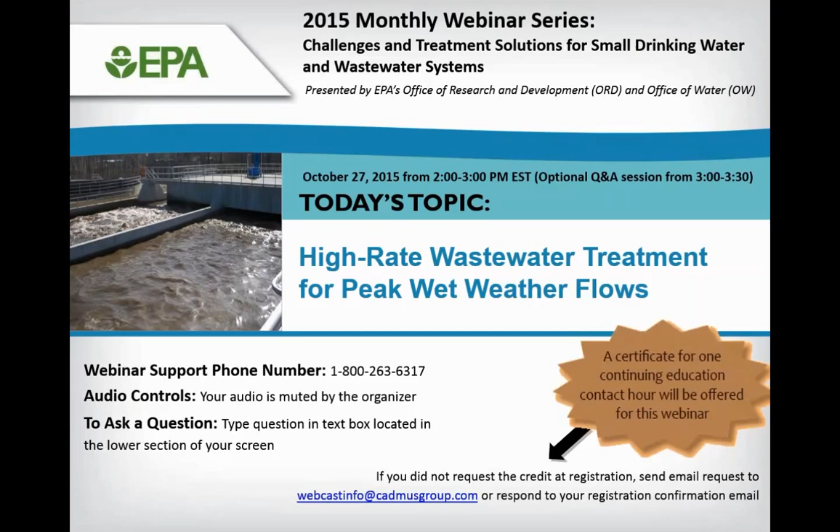Today's topic is high rate wastewater treatment for peak wet weather flows.

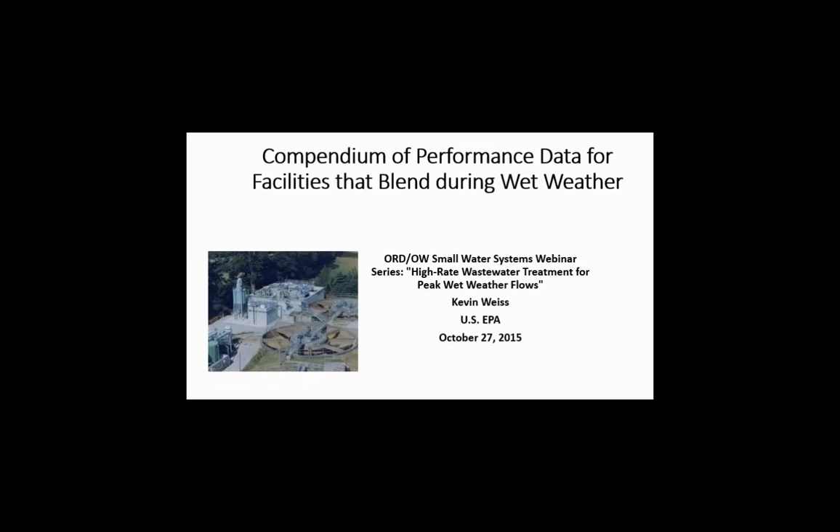With that, what I'll be talking about is a blending scenario. When treatment plants can't discharge out an overflow point and the flow gets down to the treatment plant, what they can sometimes do is provide primary clarification for all the flows coming into the plant, and limit the amount of flow going through biological treatment by bypassing the flows around the biological treatment works.

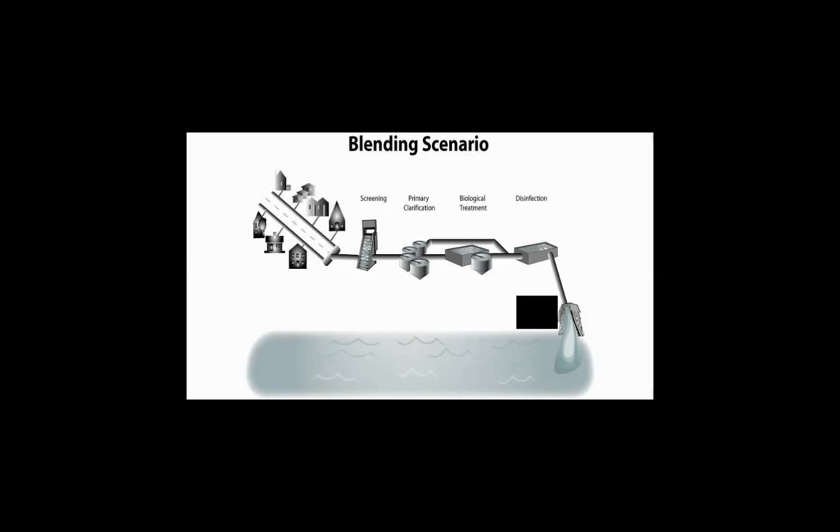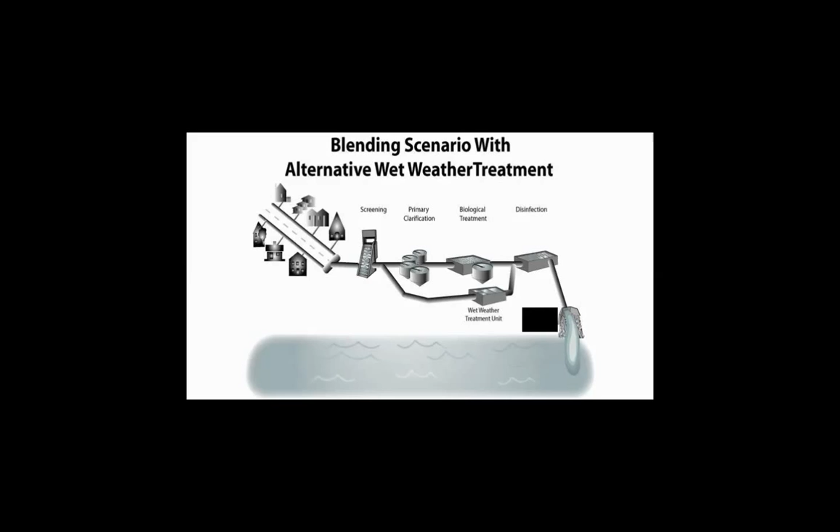I'll use the term blending to describe the scenario where flows are mixed back with treated flows from the biological treatment system prior to disinfection. The other scenario I'll be looking at is when a wet weather treatment unit, typically a non-biological system, is put on the diverted flows prior to blending.

We've been looking at this issue for a couple of years now, and in 2014 we invited a number of engineering and public health experts to discuss some of the implications with blended discharges. We ended up with 7 public health experts and 5 engineering experts. An in-depth summary of the forum we had is on our website.

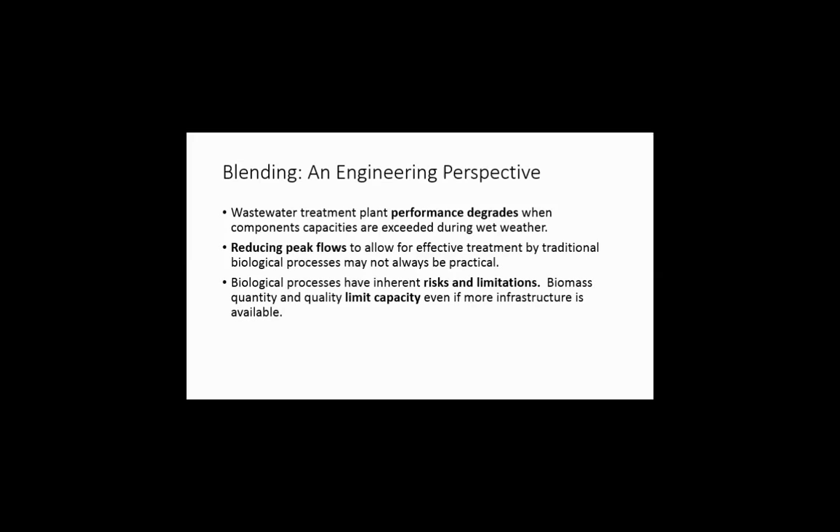We started the forum with a discussion from our engineering experts, and some of the key points they raised were that we had to be aware that performance of our treatment plants degrades during wet weather, and that it wasn't always possible to reduce the peak flows to a point where the biological system wouldn't experience difficulties.

There are some things that could be done at the plant to reconfigure the flows through the biological treatment unit, but at some point that started to decrease the treatment effectiveness. The experts said that one thing we should be looking at are physical chemical methods to treat the wet weather flows, and they emphasized that there's going to be more and more problems with wet weather flows as more nutrient controls get online at treatment plants, making them more sensitive to these wet weather flows.

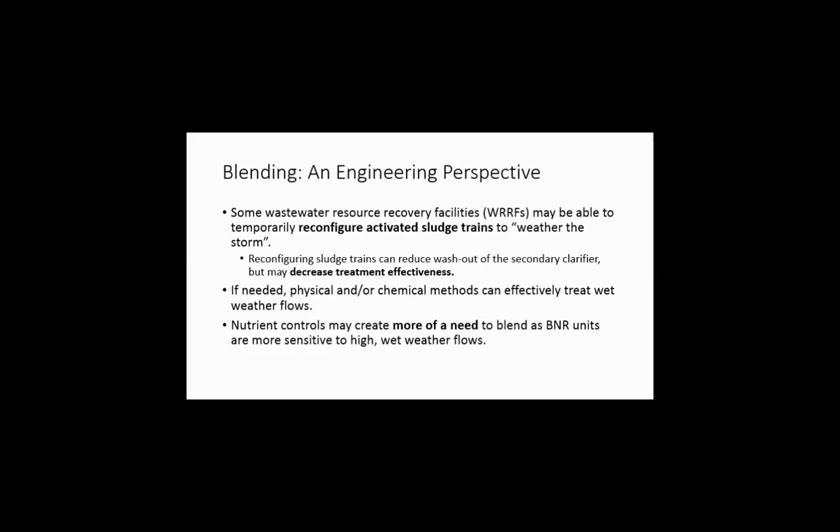The public health experts talked on a number of subjects which are listed here. The first being the knowledge gap, and one thing they emphasized is that the human health risks associated with wet weather flows and blending in particular at treatment plants is going to be very site specific, so we weren't going to have epidemiological studies to guide us. Instead we'd have to look at monitoring data from specific facilities and take a look at the receiving water to make estimates on the impacts.

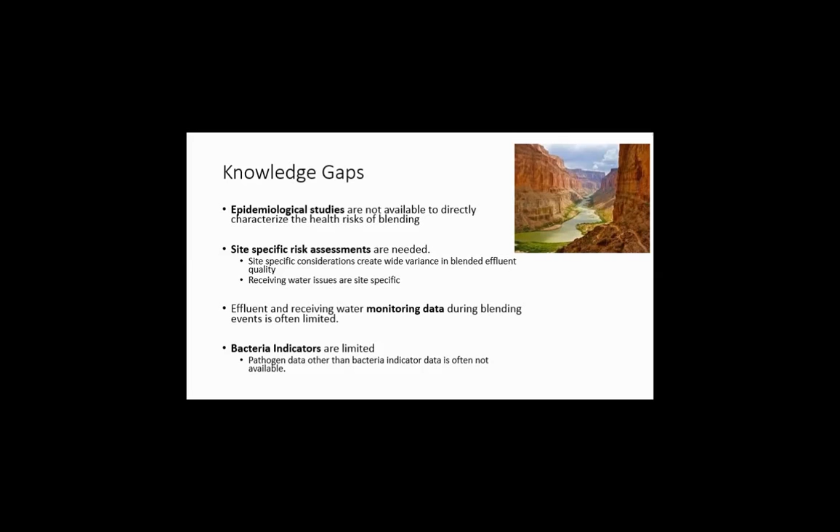One major problem facing us is that most facilities look at bacteria indicators, and those are very limited in ways I'll discuss later on. The biggest limitation is the lack of correlation with viruses. A lot of studies have shown that viruses are really the leading cause of illnesses associated with recreational water contact, and the bacteria indicators we tend to use now are not good indicators for assessing the risk of viruses. So this was going to be a big issue for us.

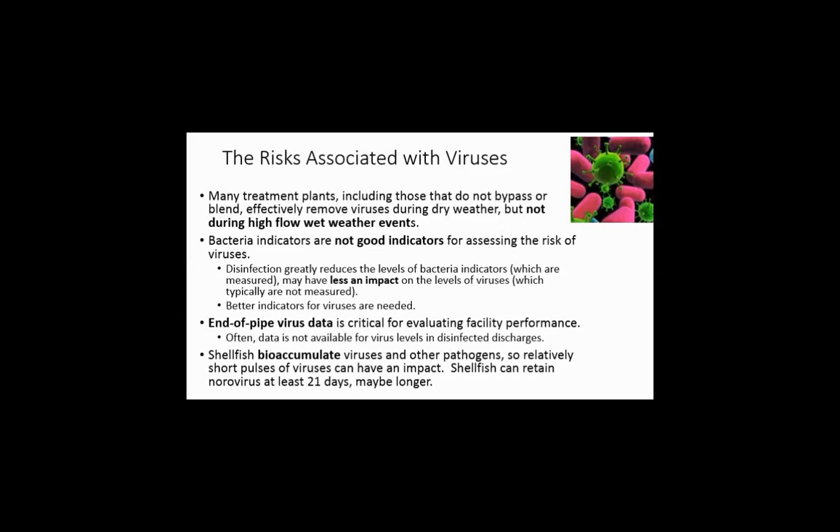The engineers stressed the importance of the disinfection unit. They indicated this is probably the most important unit for reducing viruses and other pathogens, and really the way a lot of the engineers looked at it was that they start with the disinfection unit and use that as the basis for plant design.

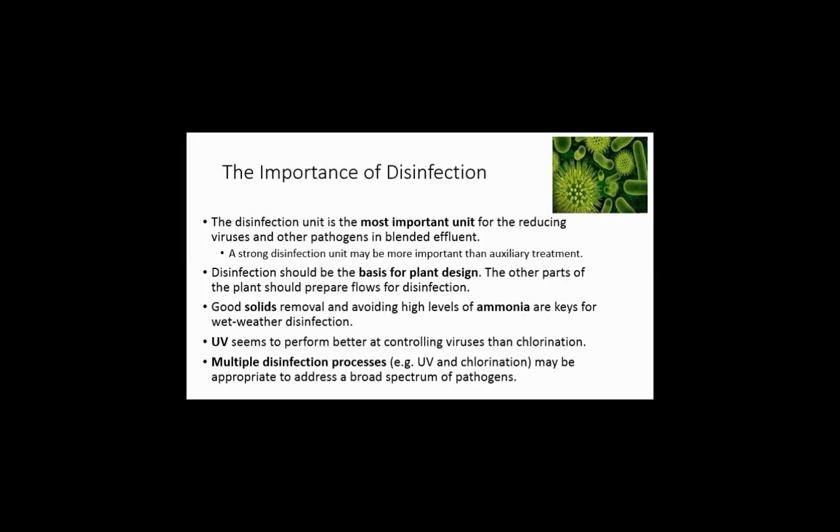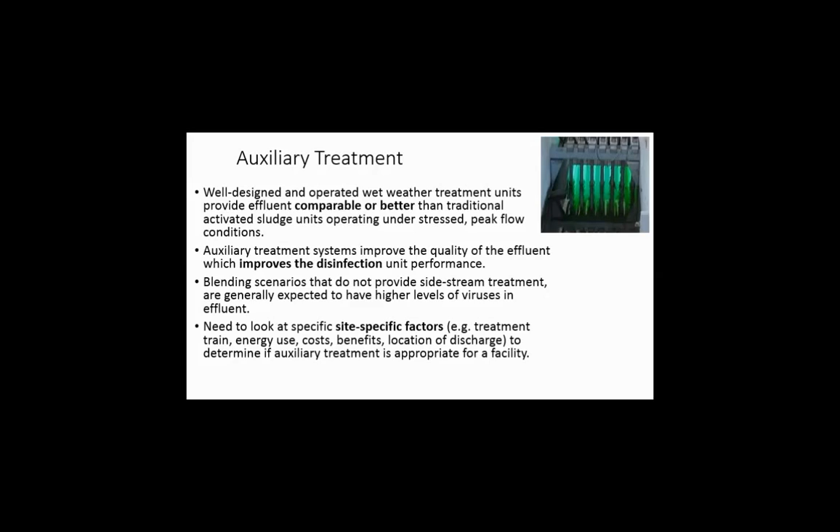However, the engineers recommended that there were cases where side stream treatment, or physical chemical treatment on flows diverted around the secondary treatment units, would be appropriate and something we really should take a look at. They felt that a well-designed physical chemical unit could give us performance comparable or better than traditional biological units working under stressed conditions. The importance here is to remove the solids so that it will improve disinfection.

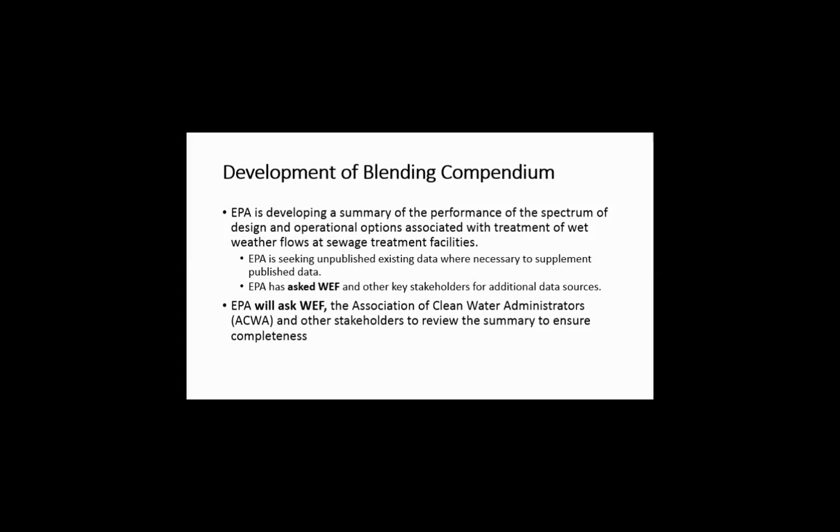With some of the gaps we noted coming from the public health forum, we realized it was important for EPA to try to gather data on the performance of treatment plants under wet weather conditions. That led us to work on our current project, the development of a blending compendium, which will try to summarize data from facilities around the country. We're working with WEF and other stakeholders to try to gather data on this, and this is an ongoing project.

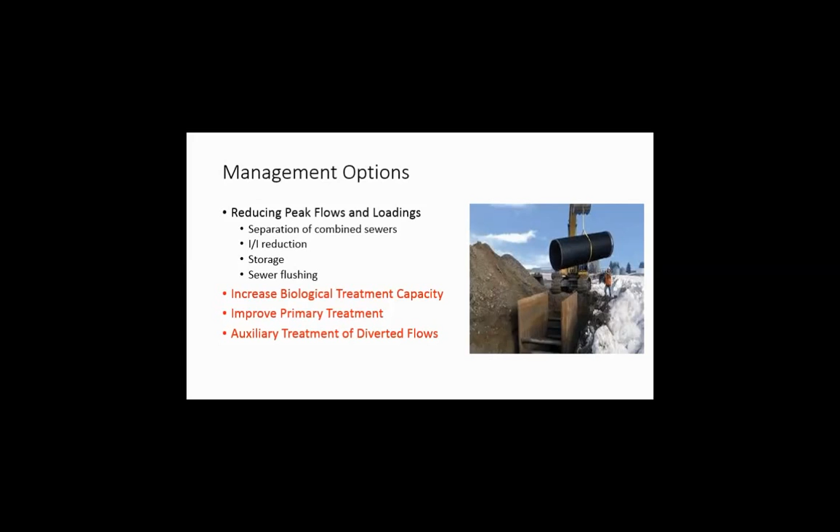I want to set the stage for the compendium a little bit. Looking at everything going on during wet weather, there's a lot that needs to be done in terms of reducing the peak flows and the loading. Unfortunately, the compendium's not going to do that. We're just going to focus on the treatment plant, looking at ways being done to increase biological treatment capacity as well as improve primary treatment and treatment of diverted flows.

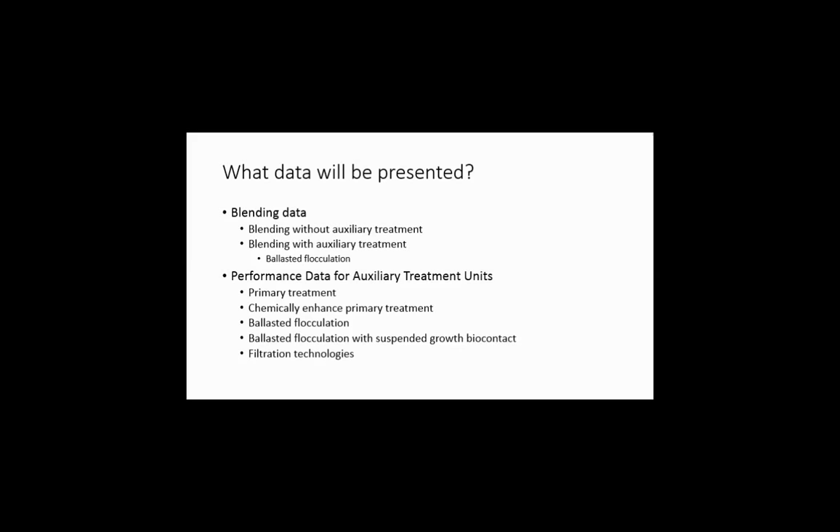We're hoping to present some data on facilities that blend. Unfortunately, we haven't been able to track down a lot of data that specifically looks at blending at facilities. So what we are also going to do is look at the performance of some of these physical chemical treatment systems.

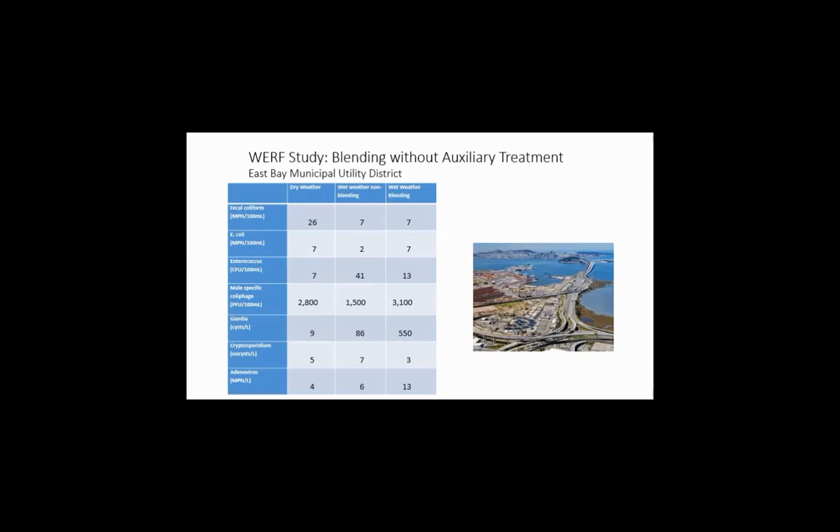We have two major studies that looked at blending without any sort of side stream treatment. The first was a WERF study that looked at the East Bay MUD facility, located in Oakland, California. This was a system serving a sanitary sewer system, so the flows were high but not tremendously high, and it also had a very good disinfection process going on. In this particular case, we did see some slight increases in some of the pathogens when blending was occurring, but really the data was very comparable to what was happening without blending during wet weather, or even during dry weather.

We had a second study that ORD helped develop in working with the IEC, looking at three treatment facilities in New York City served by combined sewers. Because these facilities were served by combined sewers, they were having much higher flow conditions. We also noted there were some operational problems at some of the facilities. This all goes to show that the data we tend to look at from wet weather facilities is very site-specific.

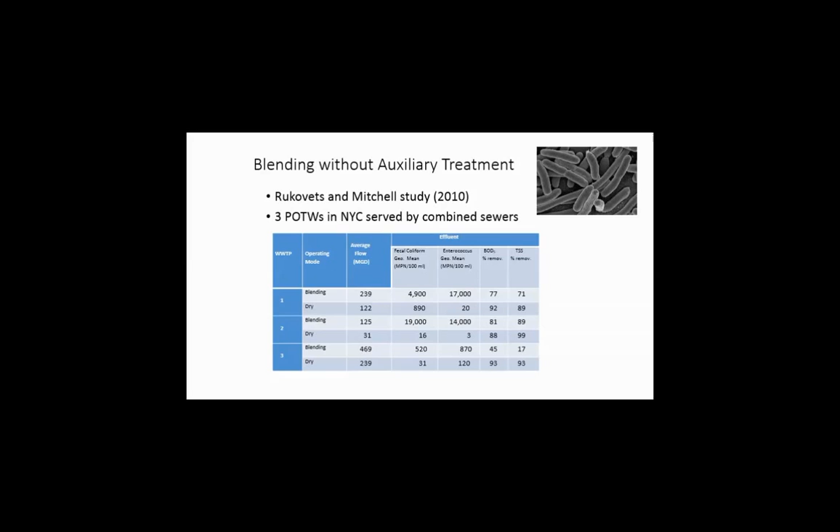One of the keys in this particular study was the disinfection units. Here they had limited capacity in their disinfection units, and when they got into a wet weather scenario, they had to cut down the contact time for the chlorination they were using. As the data showed in the previous slide, there was much less pathogen reduction during blending.

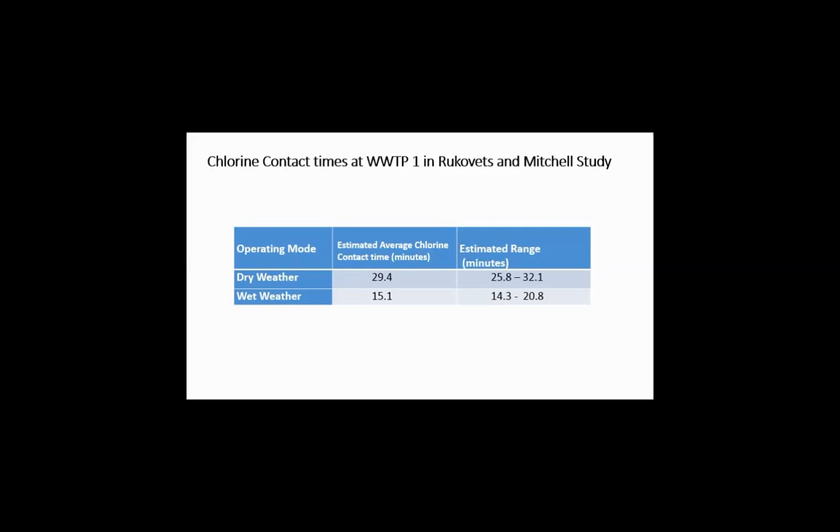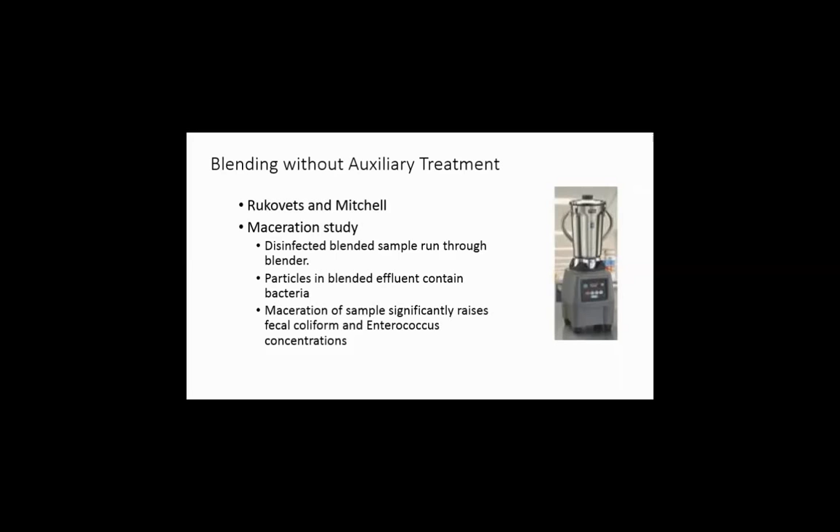Another part of their study was to look at the particles in the effluent. They took effluent samples and put them in a blender, then retested the samples coming out. What they found was that the effluent had a significant amount of particles, and when they went through the disinfection process, the pathogens on the outside of the particles were killed, but they remained viable inside the particle. When they got into this blending environment, they were released, and hence you had much higher counts of pathogens after blending.

So we've been looking at facilities that try different techniques to improve the treatment at the plant. One of the things we've looked at is chemically enhanced primary treatment, and here you can see we have some fairly significant improvement in terms of TSS removal, which is ultimately going to help us with our disinfection. In addition, we're able to increase the capacity of these primary treatment units by using chemicals to enhance the treatment.

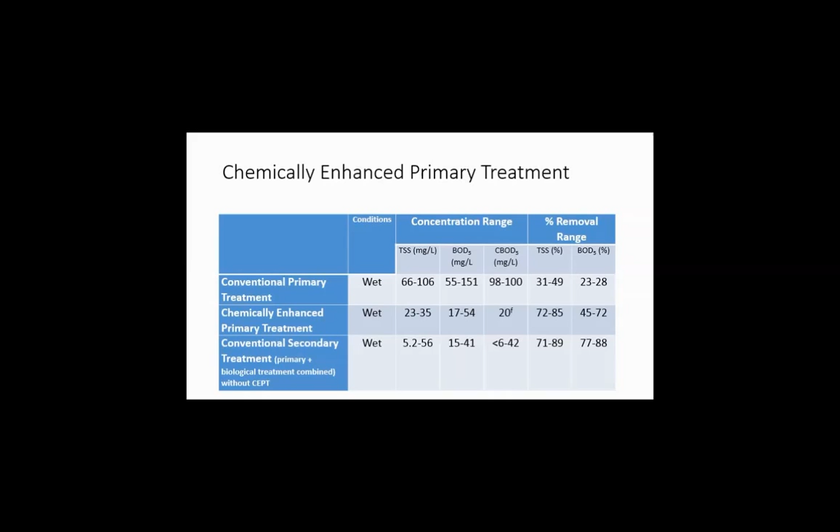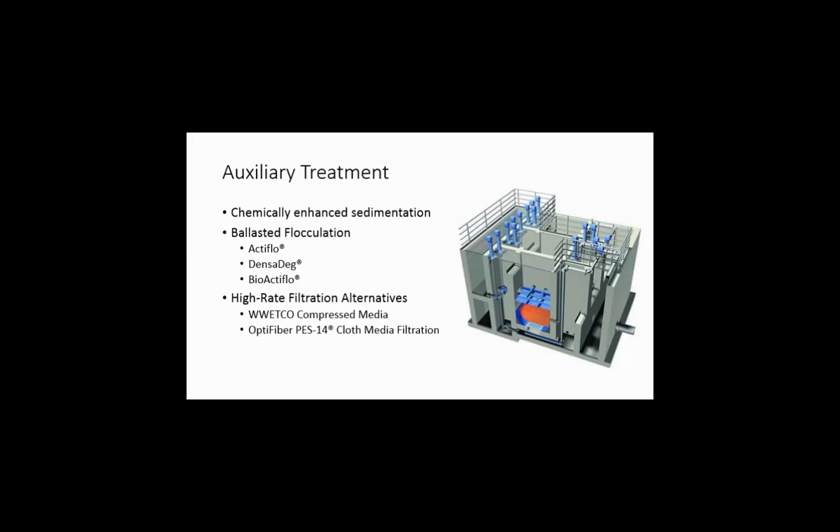We were also able to look at a number of physical chemical treatment systems on the diverted flows around the biological system. One was a ballasted flocculation system. The vendor refers to it, or the trade name is, Actiflo.

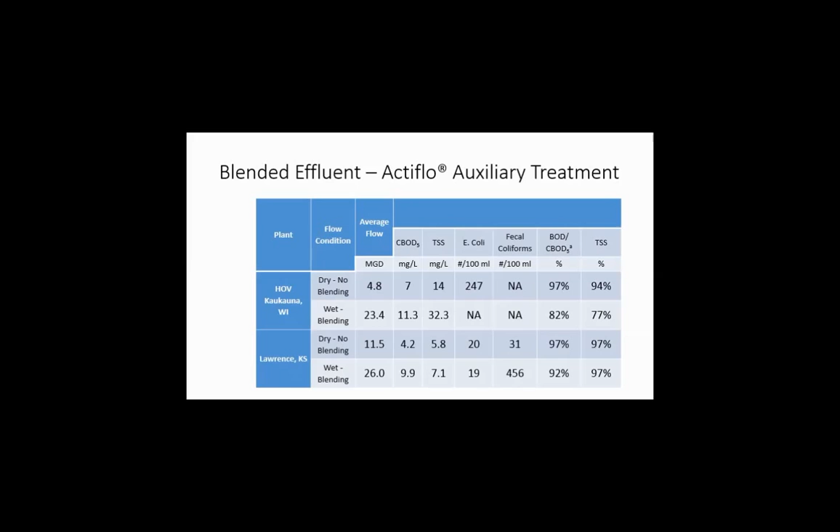In terms of blended effluent, we were able to identify two facilities that had good blending data, and we tend to focus a lot on the BOD and TSS data. As you can see, you're getting good TSS removals during blending, particularly for the Lawrence facility, and somewhat of a reduction for the BOD, particularly in the Wisconsin facility.

In addition to the blending data, we also had some specific data on how the unit itself was performing - this was coming straight from the unit without blending. I think one of the things this really shows is that the performance of these facilities really depends on how well the system's operated and what sort of chemicals are used in preparing the solution for the ballasted flocculation system. You see a fair amount of variance here.

The Lawrence facility was our star facility, and we talked a number of times to the operator, who attributes it to 10 years of experience running it, and that they really emphasize training their personnel and fine-tuning what's going on with it. The results show here - some of the other facilities are not getting as good results.

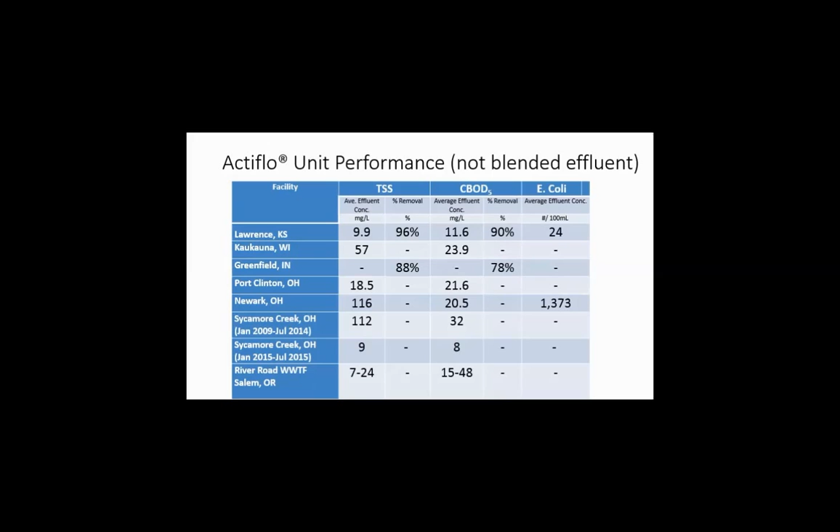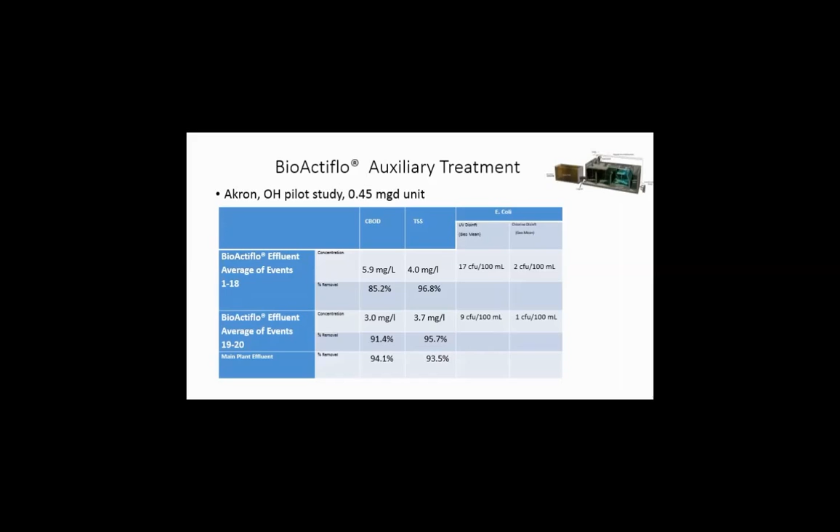The vendor for the Actiflo facility made some modifications to try to get additional BOD removal. They added a biological component with a short contact time, on the order of a minute or so, but that short contact time was able to get significant results in CBOD loading reductions. Depending on how the system is run, they were able to get above 90% removal for CBOD. What our enforcement folks found when they took a look at that system was that, as run under those conditions, it was able to meet our secondary treatment regulation requirements, which is a big deal in the wet weather context.

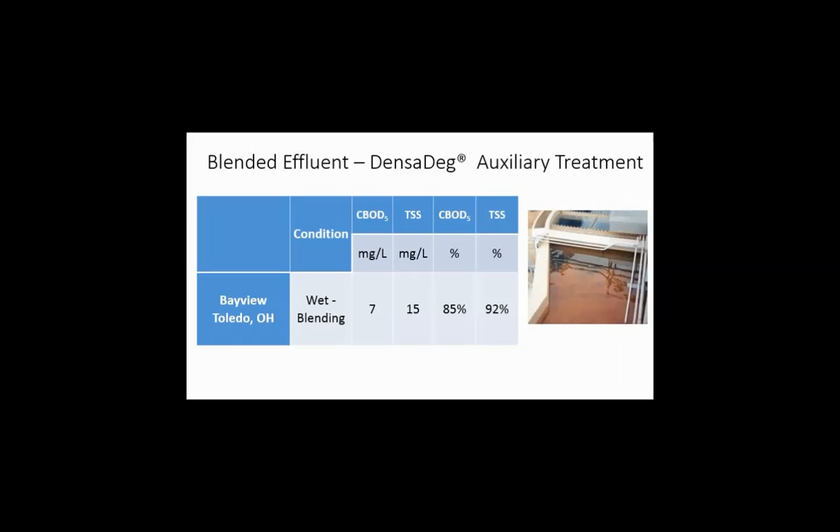We also looked at the DensaDeg product, which is another form of ballasted flocculation. We're getting data from a facility in Toledo - it's a 185 MGD facility, and it's come online a little more recently, so we're interested to see what the trends will be with performance on this.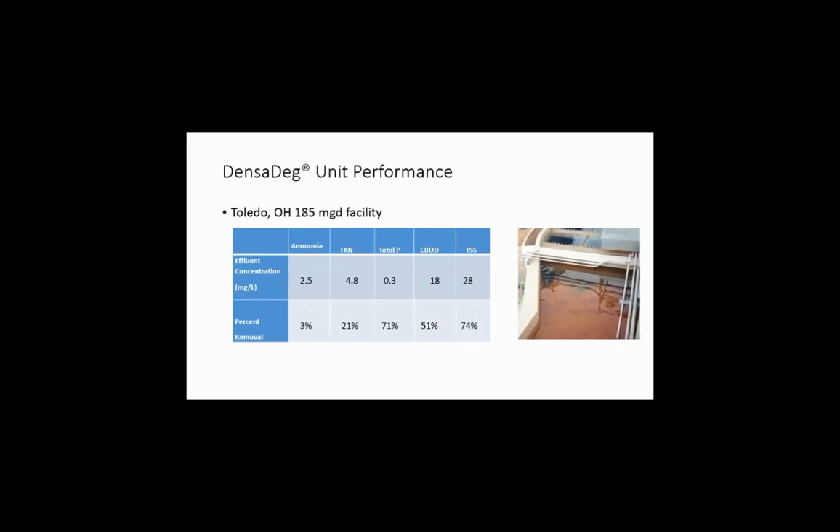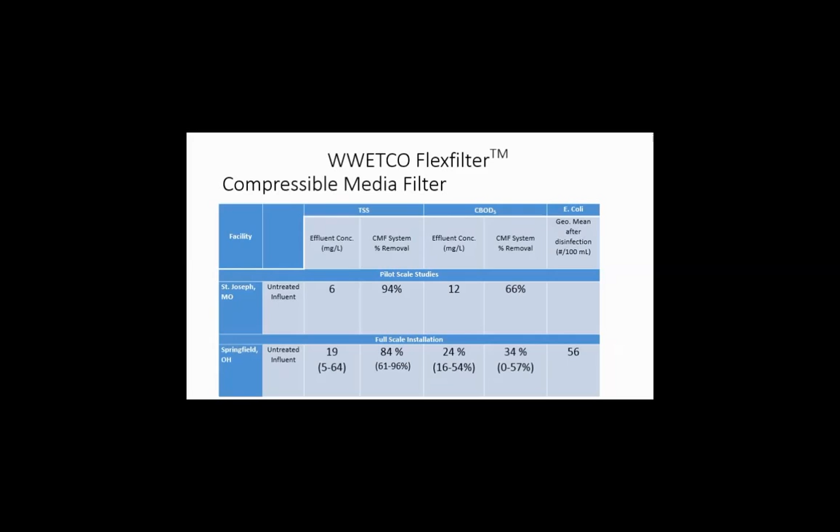Some of the other types of technologies we looked at were compressible media filters. Springfield, Ohio just installed a fairly large facility, and we're taking a look at some of the data there.

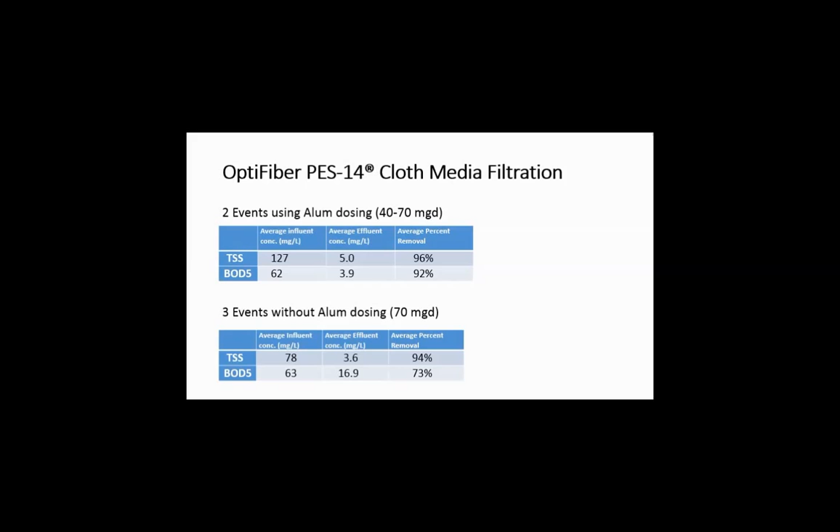Another type of technology that's been developed more recently is cloth media filtration, and we have one pilot study using this OptiFiber system, which uses microfibers. When they're using alum, they're getting quite good removals - over 90% for BOD and 96% for TSS.

Our study was also able to get data on various techniques for increasing biological treatment capacity. We looked at step feed increases, where a facility was able to increase biological treatment capacity by around 40% before the treatment efficiency started to drop off notably.

We also looked at the BioMag system, which is a ballasted flocculation system that uses magnetic particles to increase the settling. There we found facilities were able to increase their capacity by a factor of 2 to 4, which is, again, a very promising technology for us.

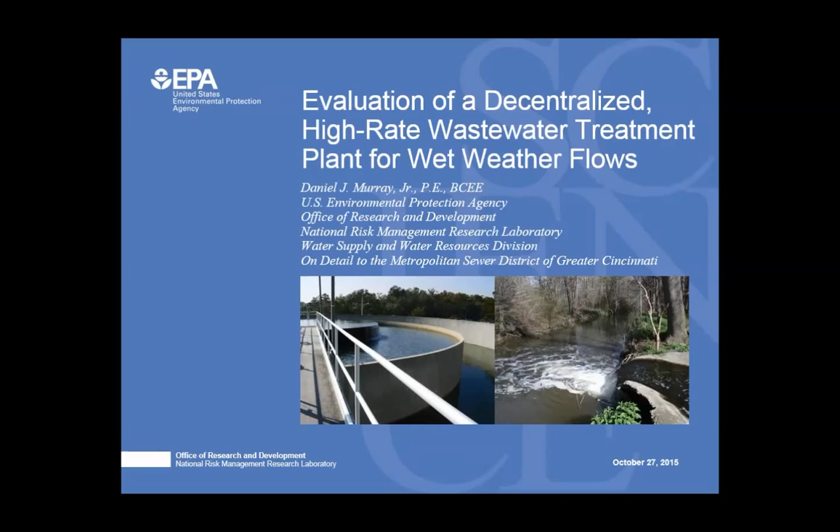Thanks a lot, Tom. As my title slide says, I'm going to talk about an evaluation we did on a high-rate wastewater treatment plant here in Cincinnati. First, I want to thank Kevin - I think a lot of what you'll hear from me will dovetail quite well with a lot of the comments Kevin made. Having worked with Kevin for a long time, I know he's really tied into the regulatory side, and some of the findings of this evaluation will fit in and reinforce some of the statements he made here just a few minutes ago.

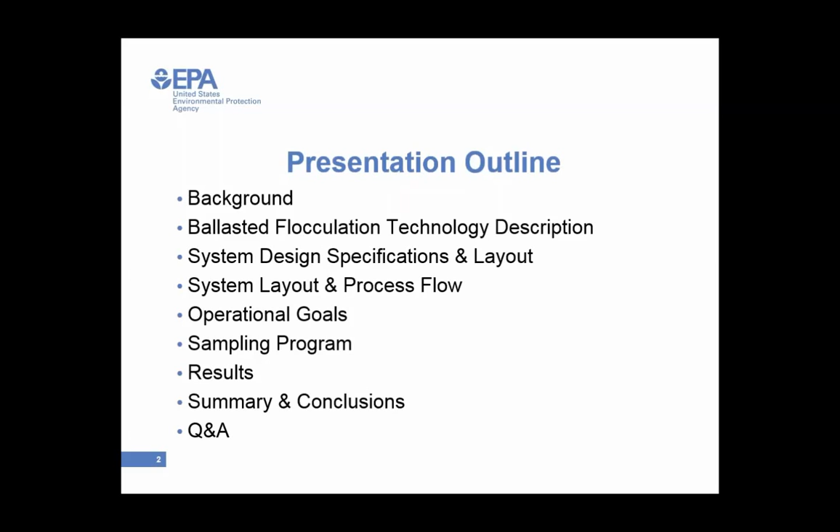Very quickly, I'll provide a shortened background since Kevin did a real good job, so I won't waste a lot of time on that. The technology we looked at here in Cincinnati is the Actiflo ballasted flocculation technology. I'll quickly show a schematic of that technology, then a bit more detail on how it's laid out here in Cincinnati at the Metropolitan Sewer District's SSO 700 facility - showing the process flow, discussing the operational goals of the plant, defining the sampling program we conducted, discussing results, and ending with summary and conclusion slides.

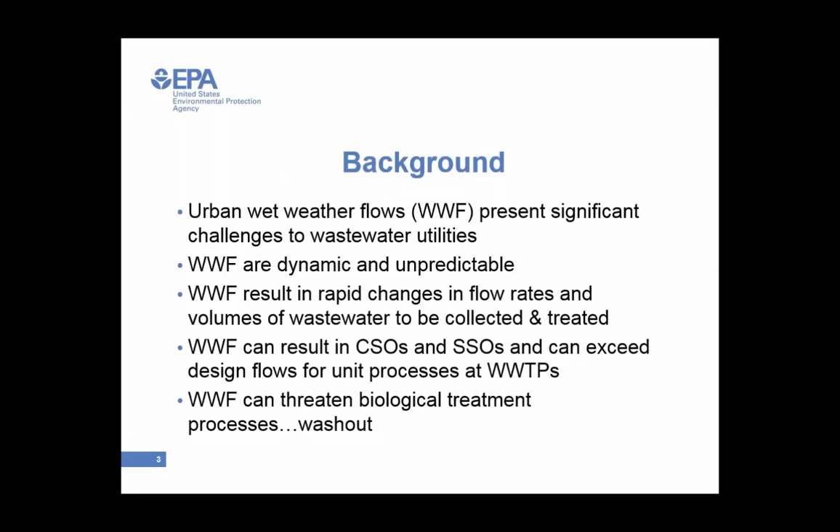I won't repeat this since it's pretty much verbatim what Kevin said - urban wet weather flows are a challenge to our utilities in this country, both as they affect overflows, whether CSOs or SSOs, and as they threaten biological treatment at secondary or biological nutrient removal facilities. As a result, many utilities are increasingly employing high-rate treatment systems to either treat overflows or manage flows in excess of design flows for biological treatment at POTWs.

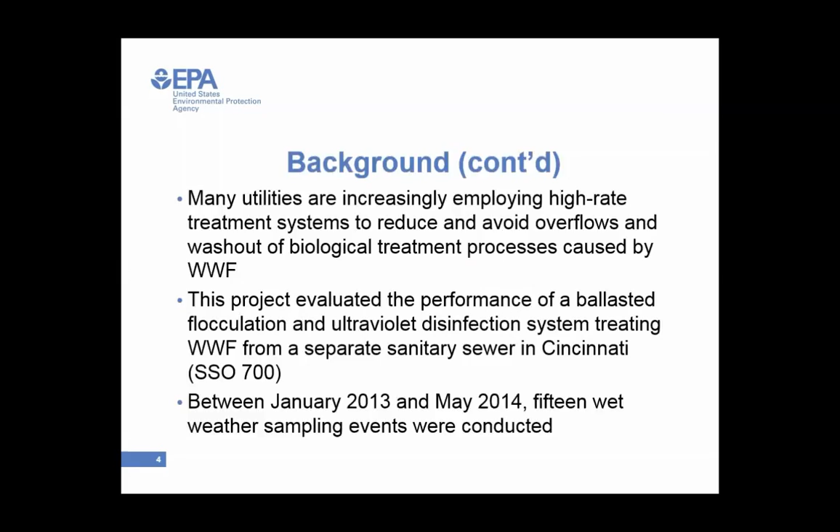This project focuses on evaluation of a ballasted flocculation and UV disinfection system treating wet weather flows from a separate sanitary interceptor here in Cincinnati at the Metropolitan Sewer District, commonly referred to as SSO 700, because the plant is upstream of a known SSO, and the main purpose is to offload flow from that interceptor to eliminate that overflow. During the time span of January 2013 to May 2014, we conducted 15 wet weather sampling events to conduct our evaluation.

The flow then moves into a more gentle, slow mixing zone for flocculation and floc development, and then flows into a settling basin. The design is an upflow settling basin with lamellar plate separators to enhance the settling of the ballasted floc.

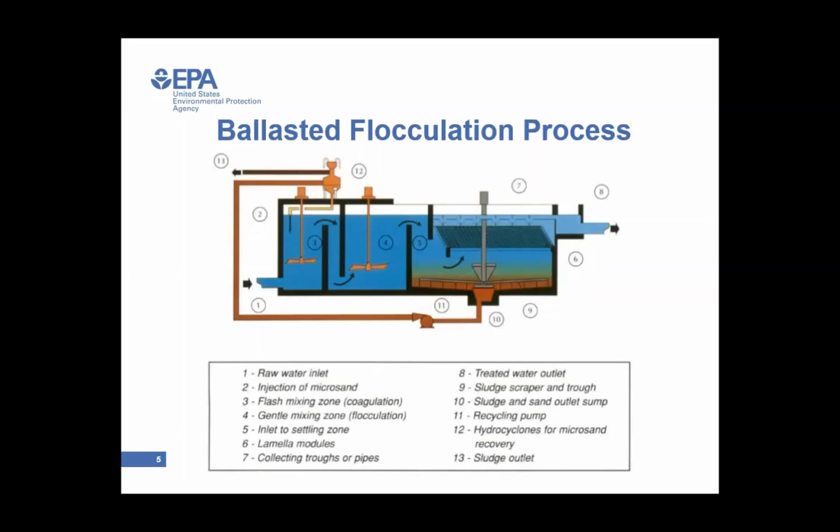So with that in mind, let's talk about the facility here in Cincinnati. It's made up of three major components, the first being the influent pump station, where the interceptor comes through the pump station. It's a 42-inch interceptor that comes into the pump station, and at certain elevations of flow during wet weather, that flow falls into the wet well.

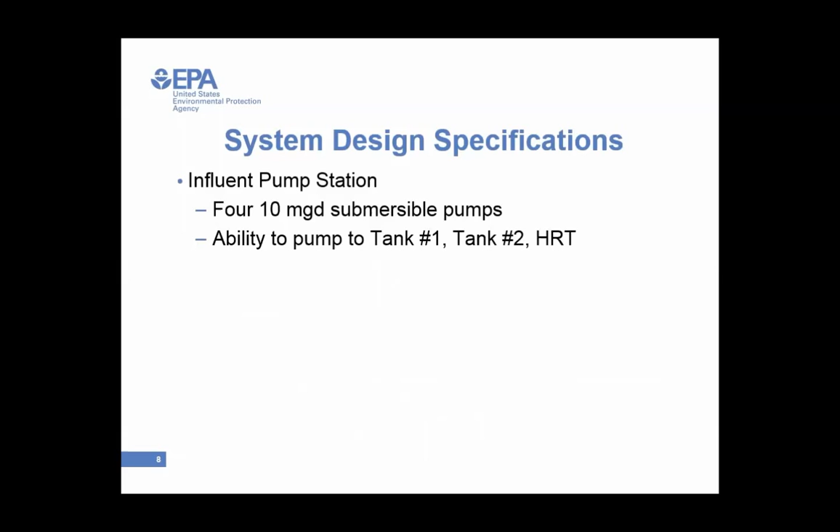The reason behind this is if there's a first flush load in the flow coming into the facility, it's captured in that first 1.2 million gallon tank and held. Then, if flow continues, it goes into tank number 2 and then overflows into tank number 3. There are 3, 1.2 million gallon tanks, with the ability to store and release to the interceptor for treatment, or the ability to release to the high rate treatment facility.

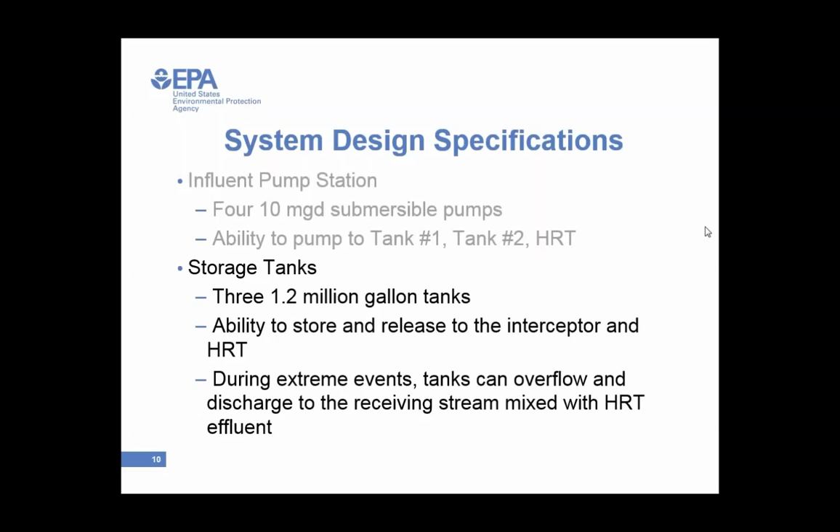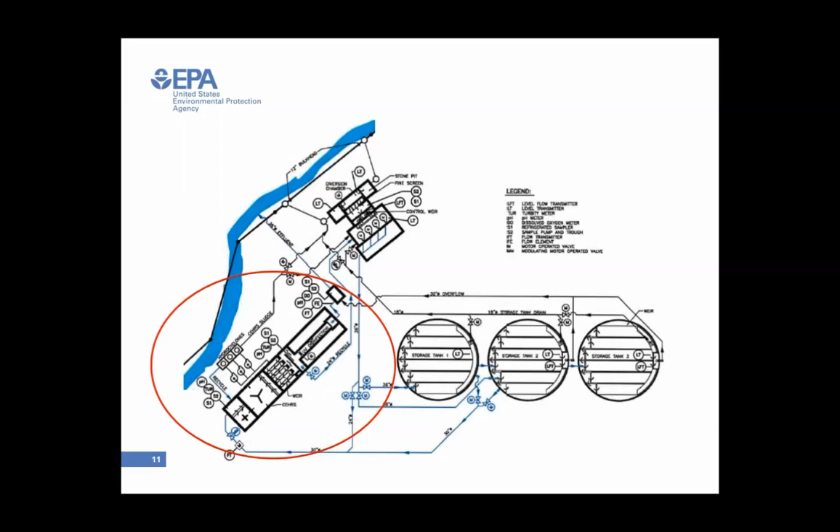Now, during extreme events, the flows can and may overflow and discharge to the receiving stream, mixed with the effluent from the high rate treatment plant. That high rate treatment plant is the actiflo plant, or the ballasted flocculation plant, combined with UV disinfection. We have a high rate treatment facility, the actiflo plant, with a range of 3 to 15 million gallons per day capacity, which translates into hydraulic detention time. Chemical coagulants, polyaluminum chloride, polymer, and microsand are all added to the high rate treatment facility for ballasted flocculation. Downstream of that facility is the UV disinfection facility, which has a capacity of up to 15 MGD.

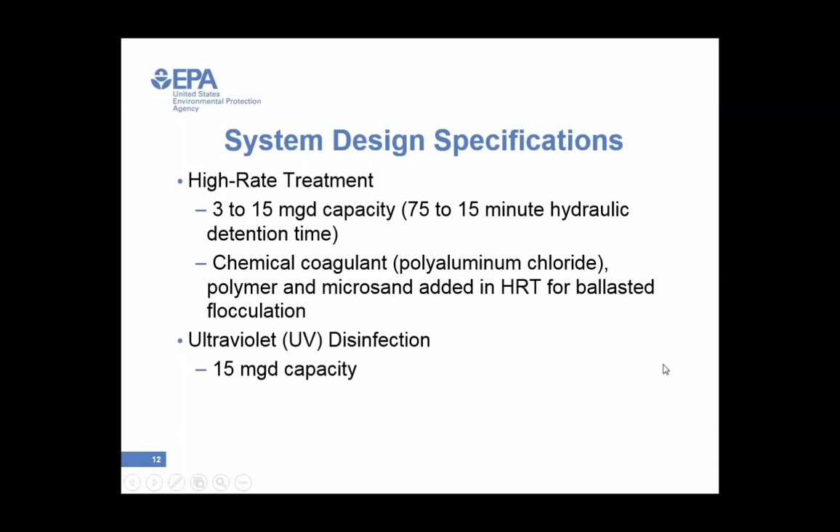Now I want to get a little more specific to the exact facility in Cincinnati and show how the flow moves through the facility, and how the process adds chemicals and sand, moves through the settling tank, and moves towards disinfection. In the upper left, flow comes out after a fine screen. The flow typically comes from tank number 2 and enters the facility, goes through a fine screen, and enters this first chamber, where it moves around a wall.

The first chemical is added here, the coagulant, added through the chemical induction unit, which I think of as a small blender, where rather than just being dripped in, it's actively mixed to disperse the coagulant in the flow, prior to flowing over the wall between that chamber and the injection tank, or high mix tank, where the polymer is added. The high-speed mixer mixes those two chemicals together and, just as importantly, resuspends the microsand. It's a very fine sand, and that high rate mixing keeps the sand suspended so it's available to react, coagulate, or flocculate with the other two chemicals.

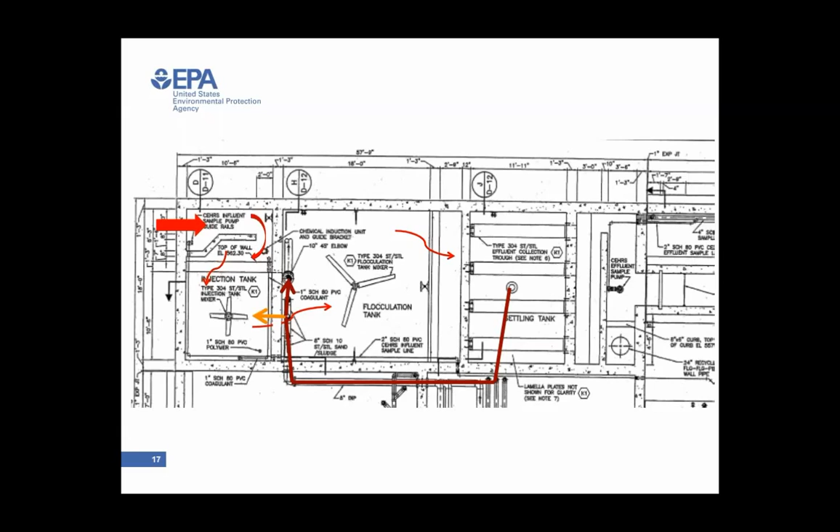I mentioned the sand. In addition, sand comes in from the settling tank sludge draw-off, goes to the hydrocyclones, and the lighter colored arrow is the recycled sand returning to that injection tank, while the darker arrow is the sludge sent to the interceptor and down to the treatment plant. That mixture then underflows into the flocculation tank, with very low speed mixing to enable floc to form and overflow into the settling tank. It underflows a baffle and then comes up through the lamella plate settlers and moves toward the disinfection system on the right.

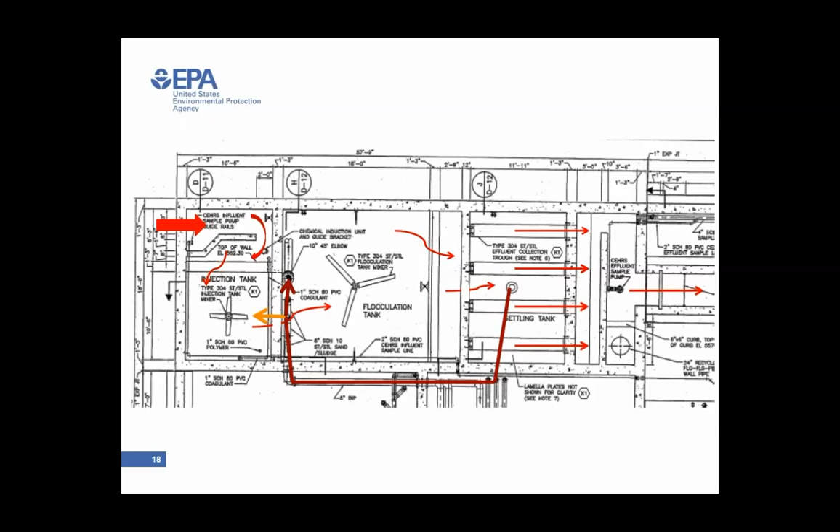And here's the other half of the facility. That flow from the settling tank comes in, goes through two cells of UV lamps and out into Mill Creek.

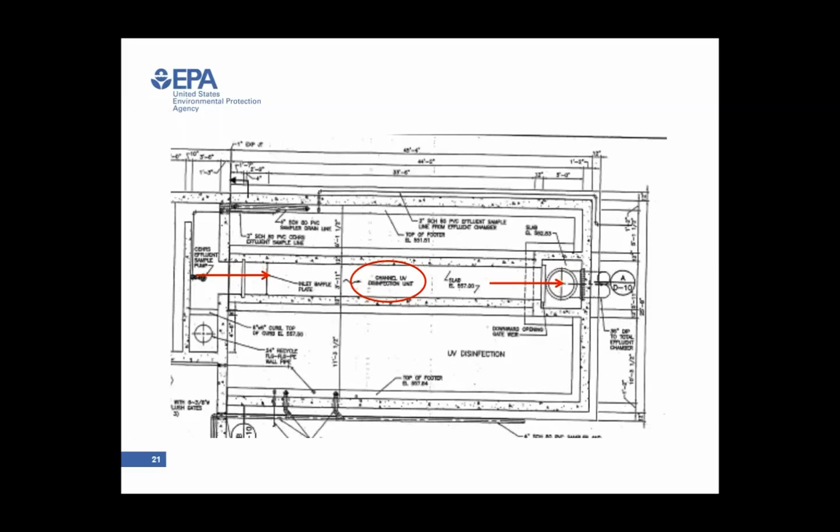Now that flow can also be diverted to the wet well in the influent pump station. In fact, that's what happens for the first 15 minutes or so as the plant is started up and things are brought to operational levels in terms of the operation, and then the flows are increased to operational flows as well.

Overall, the plant has three major goals. The first goal is to maximize storage. In some cases, when a storm is fairly small and the flow into the plant doesn't exceed the storage capacity, the goal would be to maximize that storage, hold that flow, whether it's tank 1 and whatever additional flows have gone into tank 2 and 3. Then when the storm passes, return it to the interceptor where it will go to the treatment plant for full treatment. Now those are small storms and it happens.

But in cases where a moderate storm approaches and it's fairly certain, based on experience and other parameters including looking at rainfall radar, the second goal kicks in, where at a minimum the plant will provide treatment to all flows that enter the plant. That includes those that may go to the interceptor, but when the flows to the tanks are exceeded or expected to be exceeded, the high rate treatment facility is turned on to begin to treat that flow.

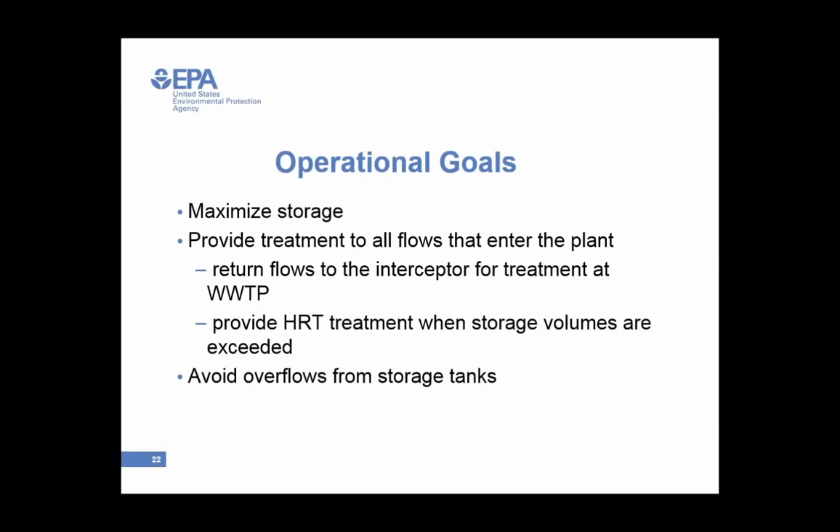Okay, with that explanation of the plant and how it operates, we evaluated what would be the sampling locations we want to identify to evaluate the performance. And we established four sampling locations. Number one being the influent to the plant, basically upstream of the influent pump station at the interceptor.

Number two is the effluent from the tanks, or the influent to the ballasted flocculation process prior to screening. Number three is the ballasted flocculation process effluent, which is that flow that comes out of the settling basins and flows towards the UV disinfection system. Number four is the final effluent, or the UV disinfection effluent, prior to discharge to the creek.

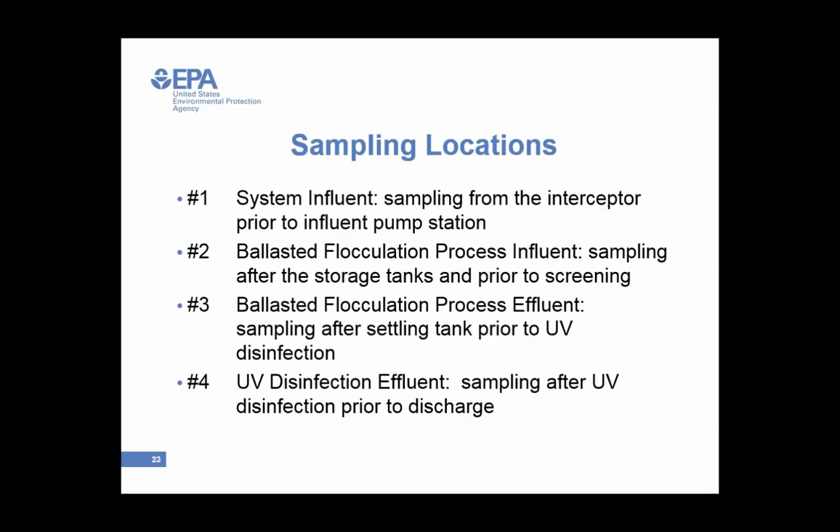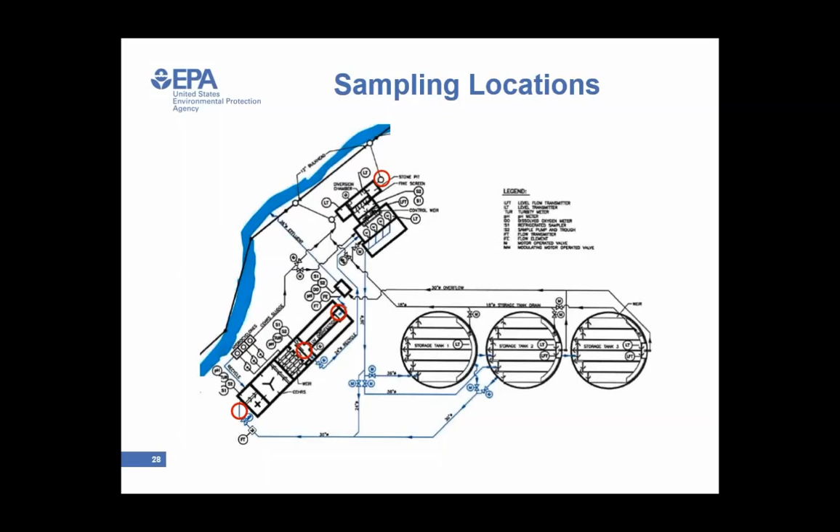Here, I'll quickly run through. Here's the manhole at the interceptor where we collected the influent samples. Down here, just prior to the screening, is sampling point number 2. Here is sampling point number 3, again effluent from the settling basin. And number 4, the final effluent or post-disinfection effluent, prior to being discharged to the creek.

As far as the sampling program, for each event we conducted 3 rounds of sampling at 2-hour intervals at each sampling location. So basically we took 3 rounds of samples every 2 hours to give us a 4-hour window of operation. For each event, we did traditional parameters — BOD, TSS, some COD — and those samples were a 4-hour composite made up of the 3 aliquots taken during the 3 rounds of sampling.

For each event, each location, and each round, 1 grab sample for microbial analysis was also taken. The more traditional or familiar microbial parameters — fecal coliform, E. coli, enterococcus — a couple viruses, the human adenovirus and the coliphage, and a few parasitic indicators: Cryptosporidium, Giardia, and aerobic endospores, parasites or their spores.

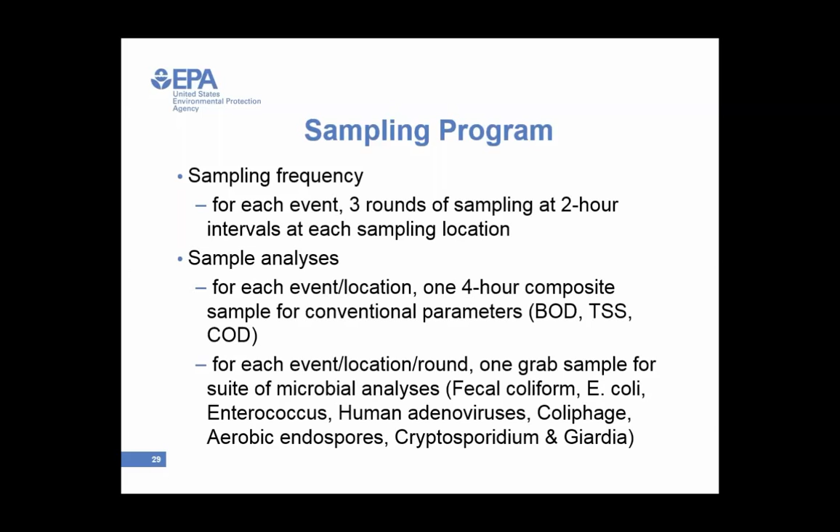Here are some results from the analysis of the traditional or conventional pollutants. Right up front, what I have here, from left to right, are the sampling locations, and from nearest to farthest are the minimum measured values, the mean measured values, and the maximum measured values. This tells us a few things. First of all, you can see that if you look at the max to min, we have quite a range of variability here in CBOD removal.

Across the plant, on average, the plant is removing about 56% of the CBOD based on our sampling. As you can see, the influent samples vary greatly, with the minimum being below 50 and the maximum being over 350.

One thing I'd like to highlight is that even though the storage tanks are there to store water and return it to the interceptor for treatment, the tanks by themselves do remove some BOD, and as you'll see in the next slide, they provide some removal of solids and BOD in the process.

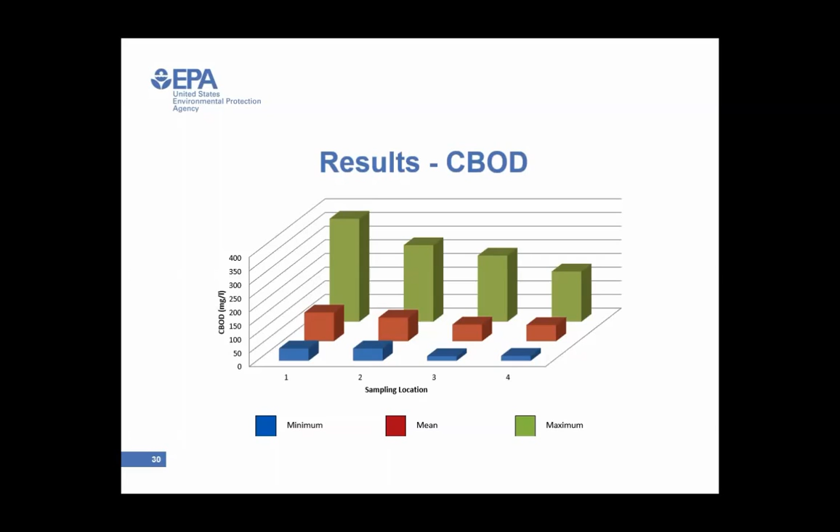For the TSS, overall we saw a 66% reduction across, on average, from the influent to the effluent. Again there's variability, but not as much as we saw in the BOD—still variability going from roughly 60 milligrams per liter in the influent to 180 milligrams per liter maximum. So generally speaking, fairly dilute, as would be expected during wet weather.

On average, it looks like the tanks removed about 15% of the solids. The effluent solids were also pretty variable, as you can see in sampling locations 3 and 4, which should be fairly close if not identical, since it's basically before and after UV disinfection. We see those ranges—for the maximum solids coming out, it looks like we're around close to 80, maybe 70 milligrams per liter.

And as you'll see in some of the microbial results, it appears that, as Kevin mentioned, when solids aren't removed, UV disinfection especially isn't as effective.

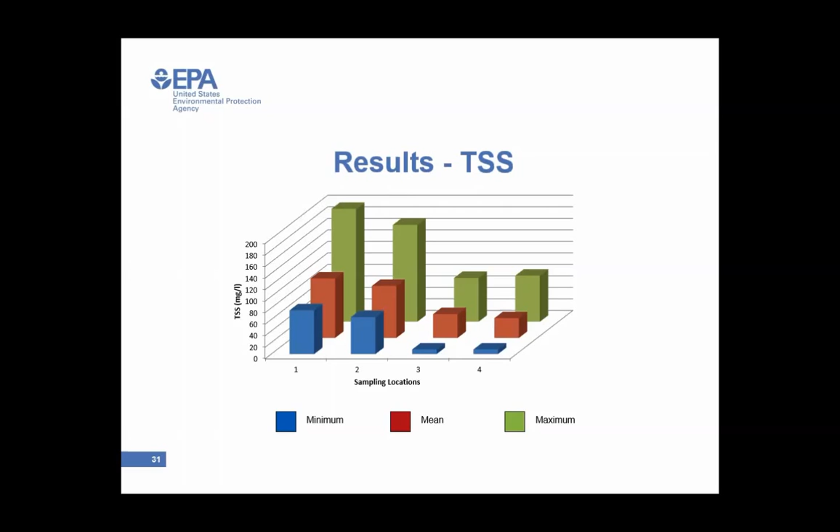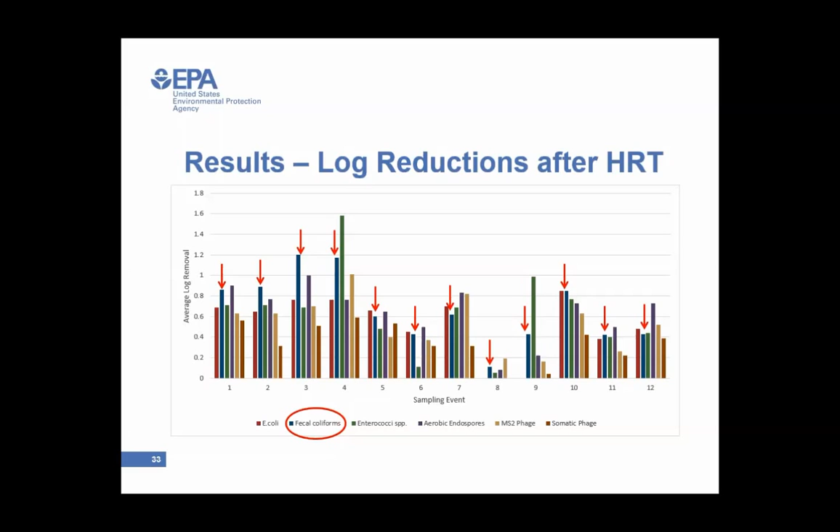These are the fecal coliform log reductions. You can see in about the first 4 or 5 events, at least through the high rate treatment facility, in terms of reduction due to solids removal, we're somewhere around 1 log removal. Past that we saw much more variable performance—I'll talk a little about that later, but I think what you're seeing in the latter half of the events are some of those issues with controlling the solids.

The full plant log reductions after UV, and again I'll highlight the fecal coliform—you see that in the early events, the plant in a few instances was approaching a 3 log reduction, which is, I'd say, in the low range of what the plant would be shooting for. But again, very variable.

It's difficult, quite honestly, to point to any one factor, but because of the dynamic nature of the flows and, quite honestly, the trickiness of operating this facility in terms of chemical addition, maintaining sand, and things of that nature—which I think is one area I'll address in my conclusion, so I won't get into that right now.

The last slide, I want to back up here. How can I back? No, I can. There it is. That way. Okay, here I am.

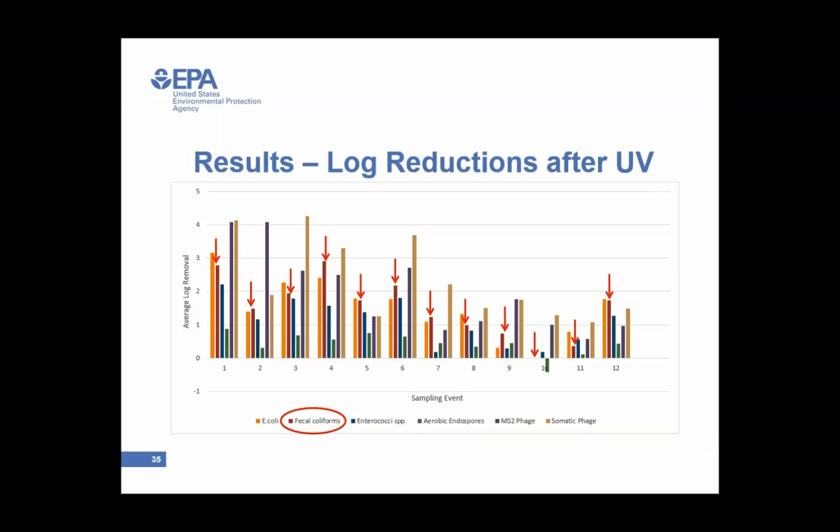I would highly recommend—I've gone and looked, there's a very complete data and literature review that the Office of Science and Technology has published as a draft document. I believe they're still accepting comments on that. So if you're interested in following up on how the use of coliphage as an indicator of fecal contamination and potential pathogenic viral contamination, I'd recommend you look at that information.

Lastly, this is the average log of detectable organisms across the plant, and the top 2 lines are E. coli and fecal coliform—more traditional, familiar indicators—and we basically saw on average that the plant got to about a 2-log reduction. Again, the variability affected that, but the plant did achieve close to 3 in some occasions.

The bottom 2 lines are the coliphage, the green and the blue, and you can see here that for those 2 viruses, the plant achieved close to a 3-log reduction on average.

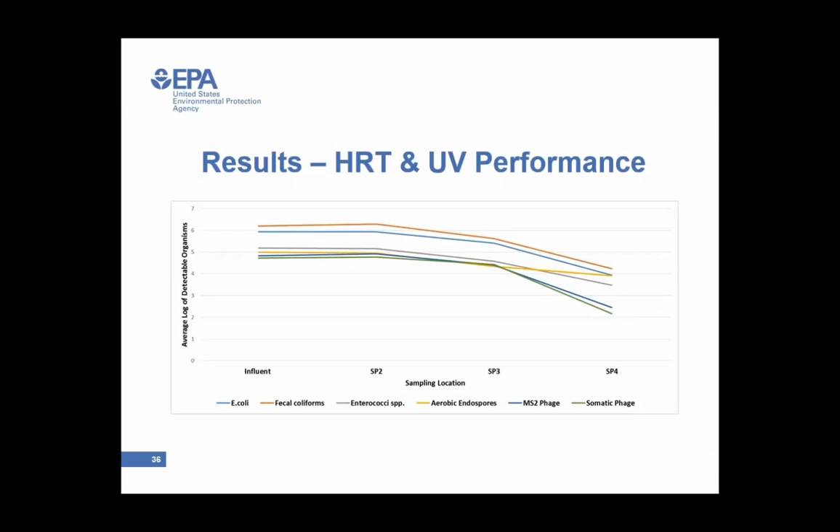So in summary, for conventional pollutants, both CBOD and solids, the average reductions through the system were 56% and 66% respectively for CBOD and TSS. The storage tanks did provide some measure of primary-like removal, not to the levels of primary treatment, but did remove 20% and 15% of the CBOD and TSS through settling.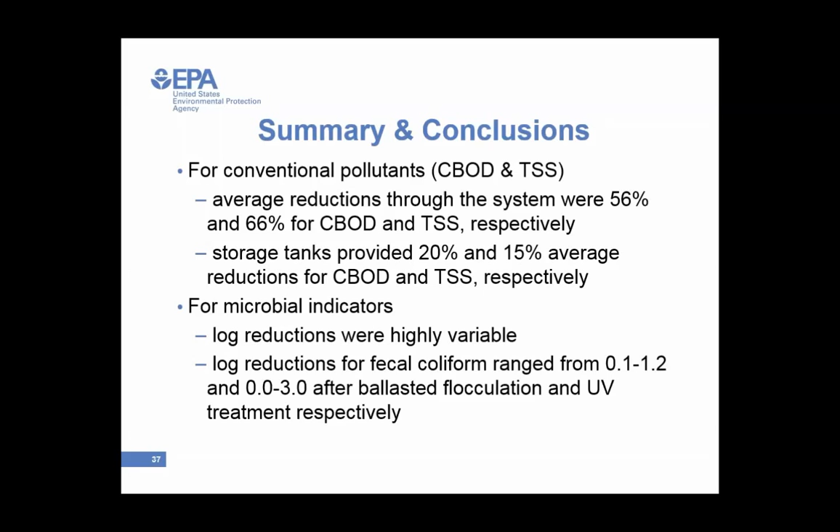For the microbial indicators, the log reductions were highly variable, with log reductions for fecal coliform ranging from 0.1 to 1.2, and 0 to 3.0 after flocculation, ballasted flocculation, and UV treatment respectively. The log reductions for coliphage ranged from 0.5 to 4.1, and the overall average log reduction for fecal and coliphage were 2 and 3, respectively.

As far as performance variability goes, the system showed it could achieve high levels of microbial control, hitting 3 to 4 log reductions on several occasions. However, the variability was very difficult to pin down, because there weren't one or two things we could point to that explained it.

So what I did was some additional investigation, and was fortunate enough to get the actual operator logbooks from those events. It appears that what we may be seeing is inconsistent removals due to O&M issues. Throughout those logs, not in every occasion and not the same notations, there were equipment issues noted.

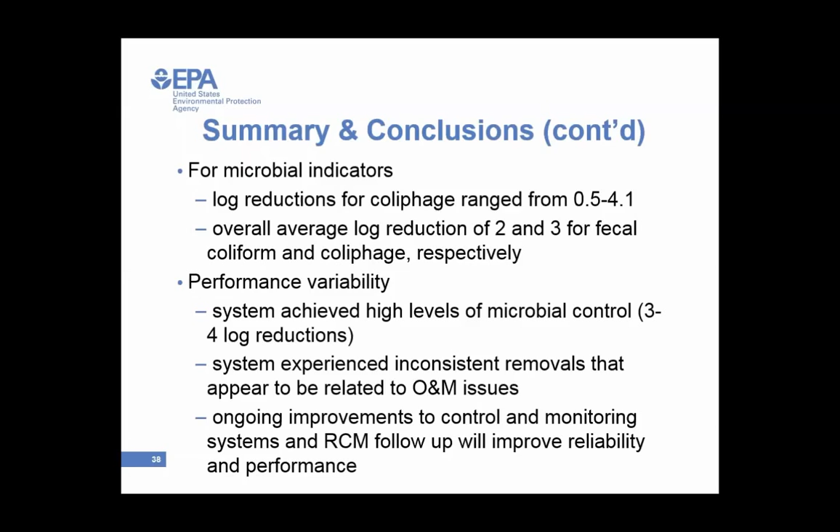And that's all I have, and I'd be happy to take questions.

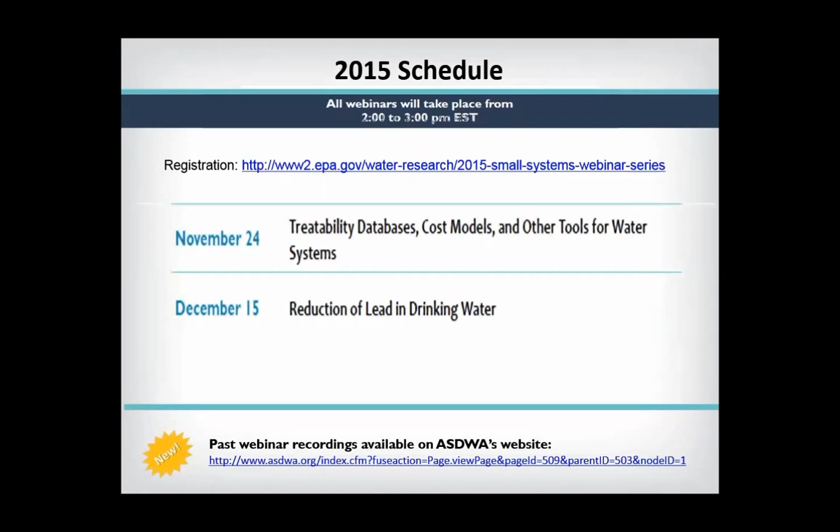Thanks, that's a very good question. Unfortunately, I don't have all the information here in front of me. I know that for the facilities we looked at, there was polymer addition and alum addition. Typically, when a facility takes a look at trying to increase treatment efficiency, they'll also get into the flow patterns and make some physical modifications too. We'll make sure a more complete write-up is in the compendium when we have a draft available. But very good question.

Okay, thank you, Kevin. Here's another one: there are cities that are proposing chlorine disinfection of untreated CSOs for their long-term control plans. How does EPA view this?

Okay, so under the Clean Water Act, the disinfection requirements are a water quality-based requirement, which in essence means it's a site-specific determination. But having said that, I think that would be a difficult situation for EPA to agree to in a long-term setting.